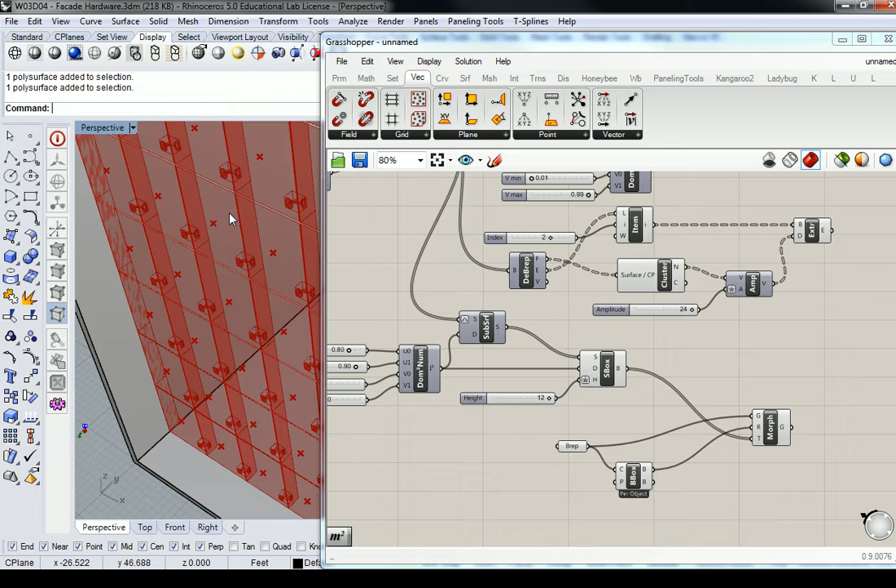All right, moving on then. So we're going to start doing the other hardware pieces, but again, I want to just stop for a moment and make it abundantly clear to you all what the limitations are of doing it with this method. So it works really fast. That's the very first awesome thing about it, because it just automatically populates all of the hardware on these particular planes in all cases.

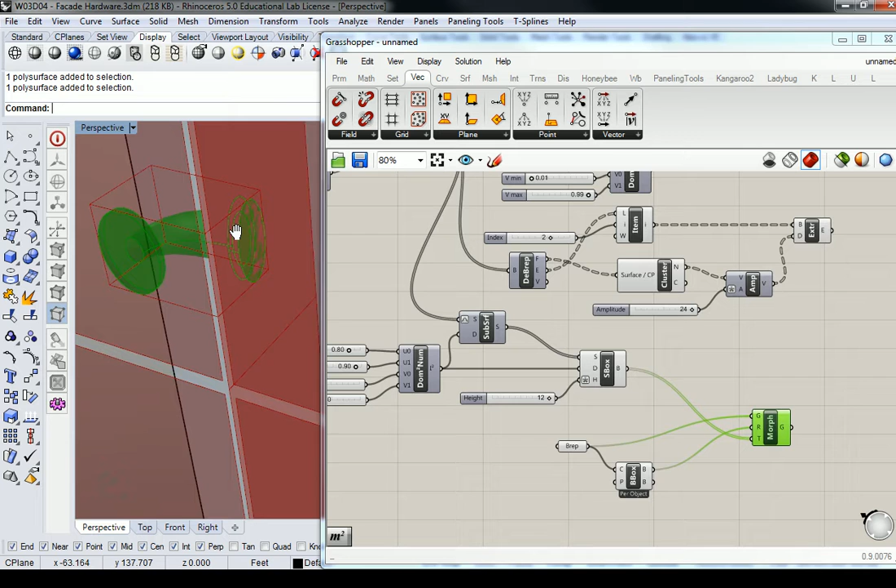However, if you look at it closely, you'll see that the geometry gets skewed. Basically as I modify this, the geometry itself will change. So if it gets kind of squished, then whatever used to be a circular element is now an elliptical element. So that's just something to be aware of. Point 2, I think, is what I had this at. Yeah, so that's just something to be aware of.

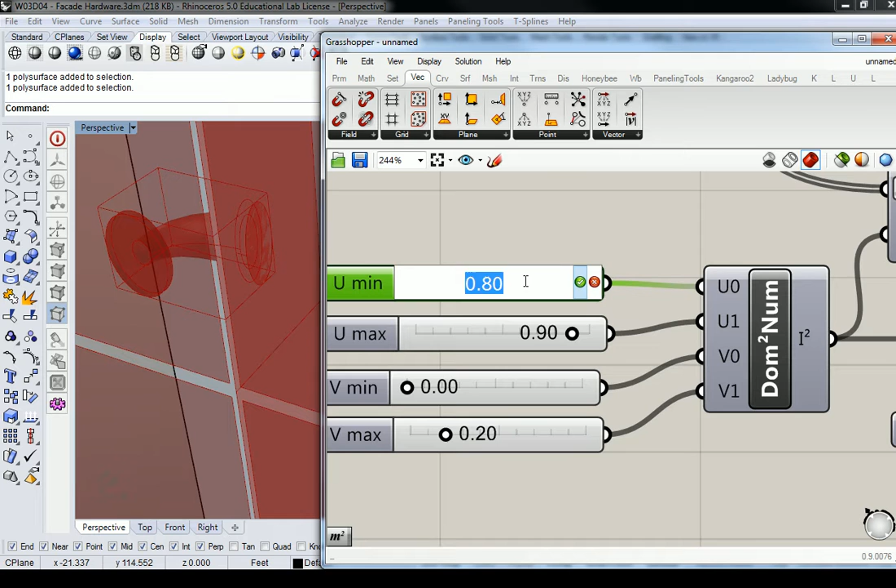If it's important that everything be properly sized and scaled, then you need to find a way to put it in that particular location in that size, and that's what we're going to look at next. But if I'm going to try and get this to be a little bit more actually circular, I'm probably going to reduce the U minimum here to like 0.85. Oh no, that's actually not good. I'll just leave it at 0.8. It's probably good that way. It's good enough for my purposes anyway.

So basically, when you're doing this, you have to do it a few times in order for it to work properly. And the challenge really is whether or not you can run things through the same process, or if you have to duplicate the entire thing. So the simple way that I'm going to do this is to create a surface output with a wireless connection here, and then it's going to be just a lot cleaner.

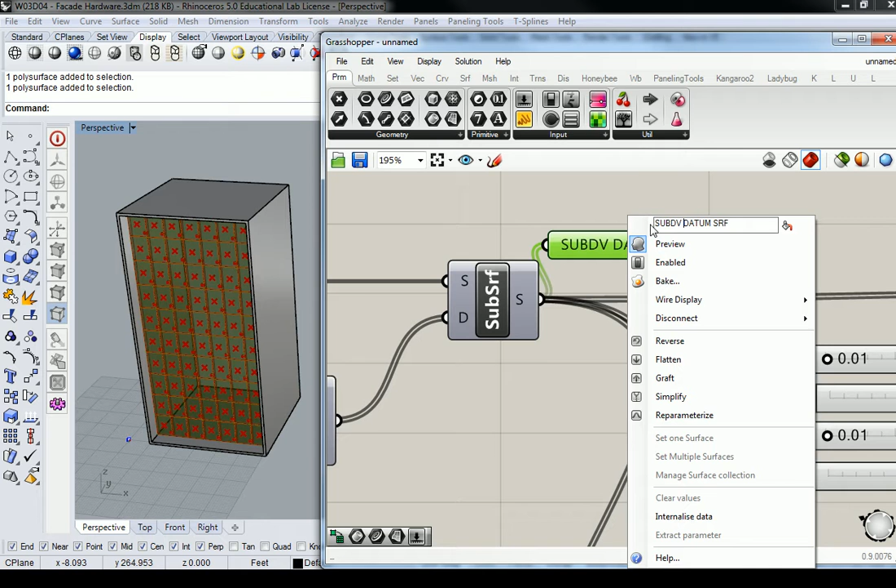So I'm going to do it with the surface param, and I'll name it datum surface. Actually, I'll call it sub dv datum surface. Plug that in. You can call it whatever you want. That's just what I'm calling it. Is it going to do the first subsurface? Yes, first one.

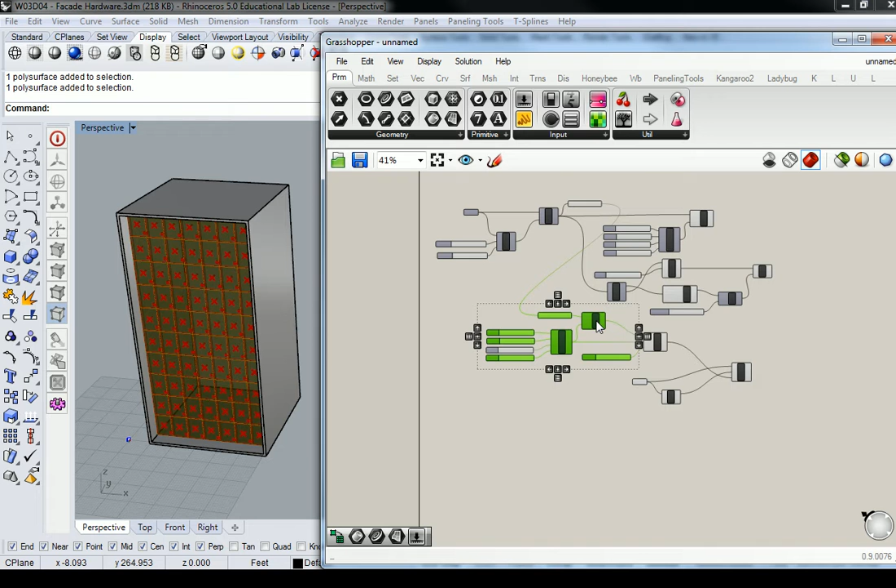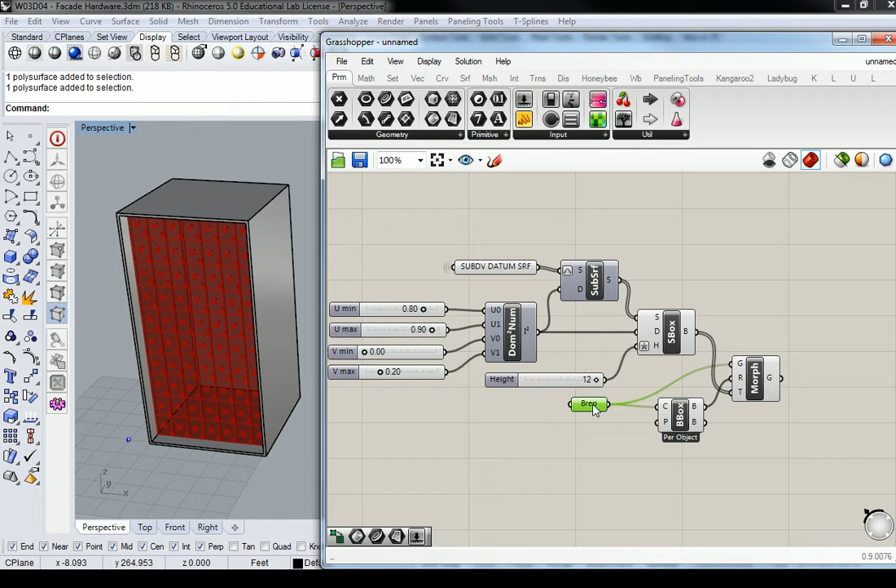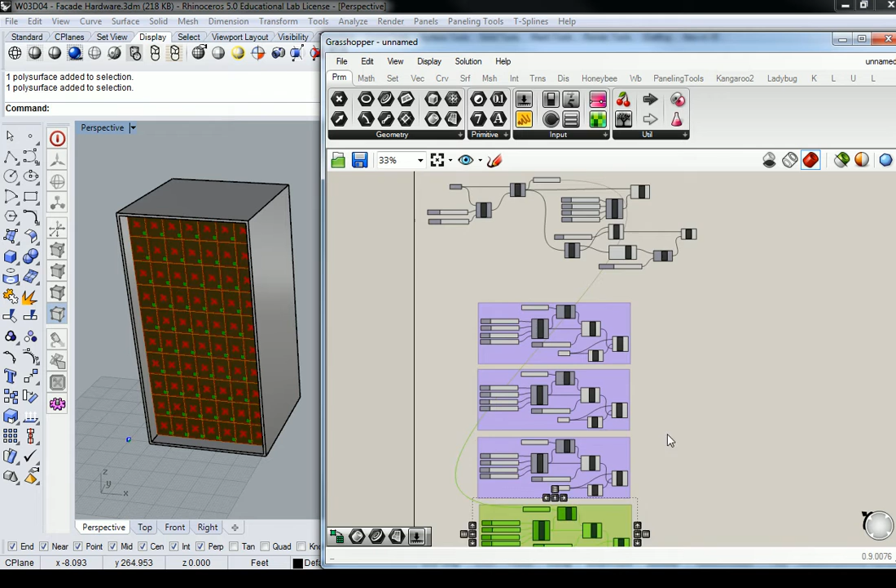All right, so I made that a wireless, and then I'm going to plug this in here. So that way this whole thing just becomes fully autonomous. So now I can select this stuff and move it away. I'll clean it up so that it becomes much, much smaller. There we go. And then simply put, I'm going to group that, and then just make a copy of that whole group 4 times. Looks pretty clean, right, guys?

Okay. Well, the other part that you will have to do here is to modify the actual numbers. The numbers can be modified a few different ways, and one of the ways that I encourage you to think about doing it is through mathematical principles, basically your simple arithmetic that helps you limit the number of changes you have to make if you ever have to make a change. It also helps to keep alignments done properly.

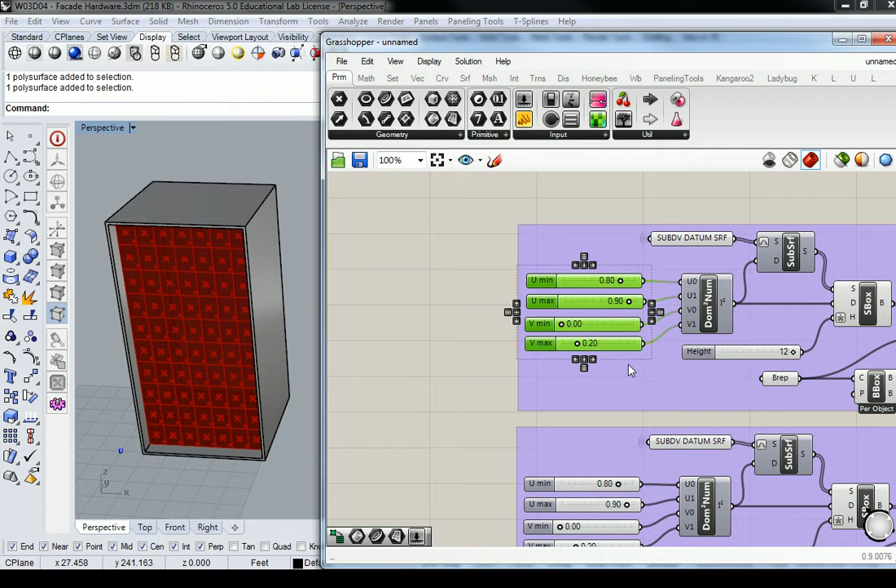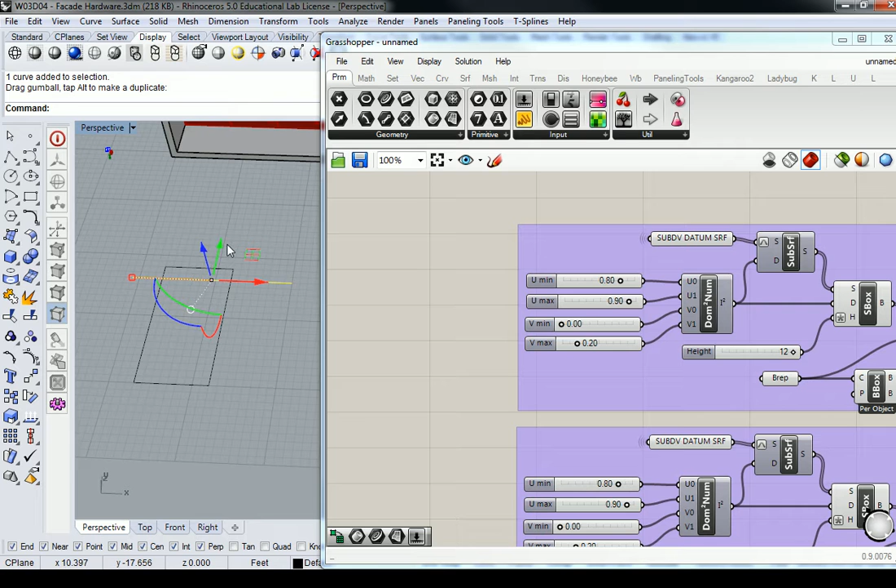So the way I'm going to do this, starting off here, well, let me kind of draw it. I'll draw it out this way, right here. You guys don't have to do this, but I want you to just understand what I'm doing. So I have a panel that looks like this. I also have a line, right? So basically, when these things are moving proportionally, I'm moving a certain percentage down this way, and then I'm moving an additional percentage down to the other side.

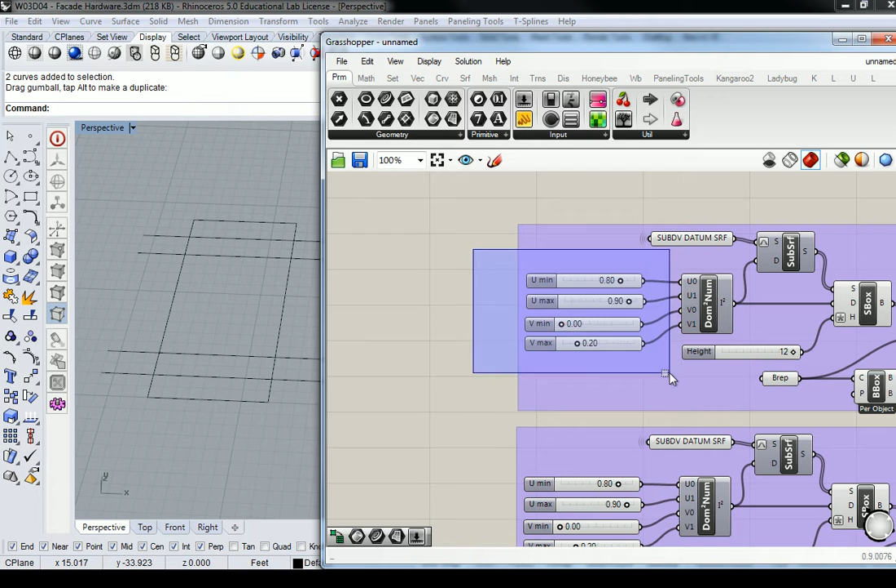So if I want everything to be symmetrical on each of these panels, then I want it to move the same amount from here to here that I want it to move from here to here. You guys can do that mathematically using the same sliders. You know what? In this case, it's not imperative, and frankly, when you're doing something like a dynamic surface, you're not going to have to be doing these calculations anyway, because every single number is going to be automatically generated. So I'm not going to bother with that. Let's just go with this.

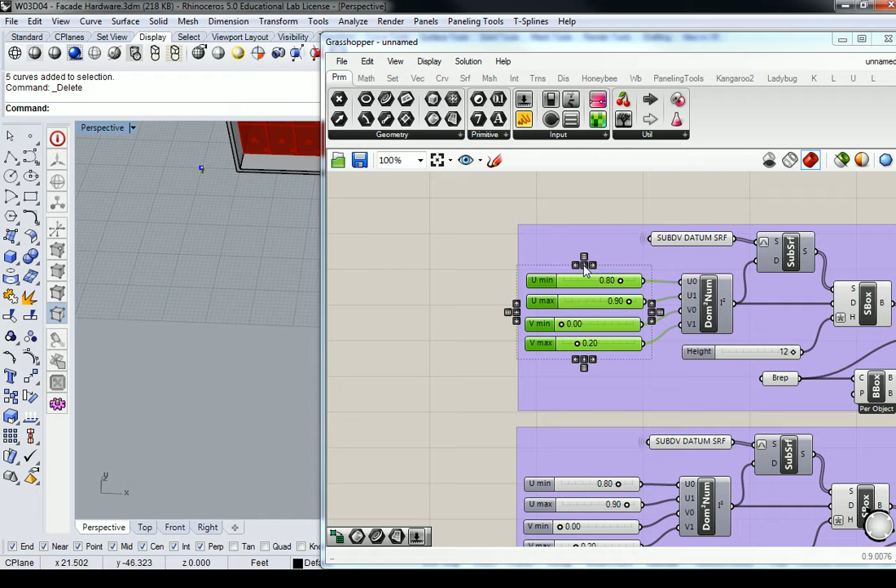I need to turn some of this stuff off. In fact, I'm going to turn it all off except for the last item, the morph. And I'm going to turn all of this stuff off as well.

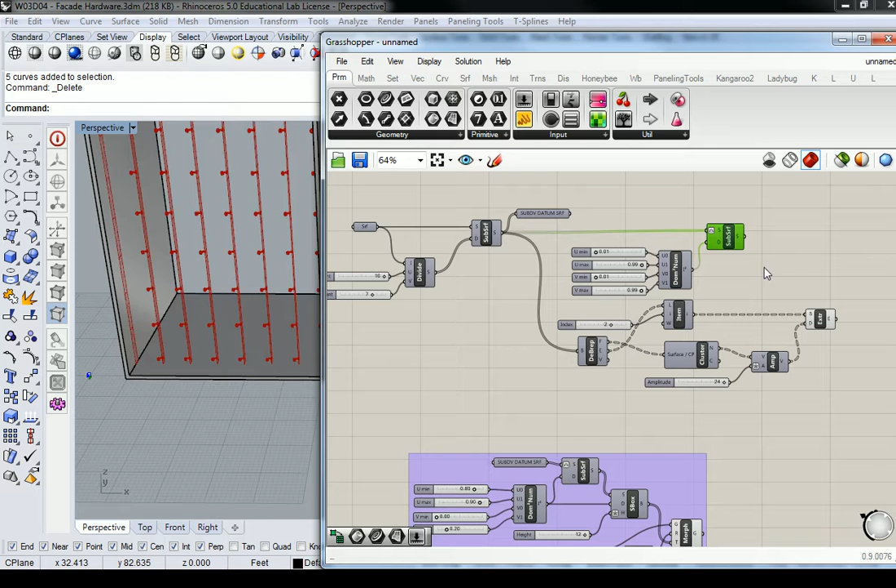There we go. So I left on the fin, I left on the subdivide surface, and the last piece, the morph. So the next one I want to do here is the vertical one, or the one that's relocated on the vertical side of the panel. So notice how this one right here was a value of 10% of the panel in height, and it was located with a spacing of 10% of the panel away.

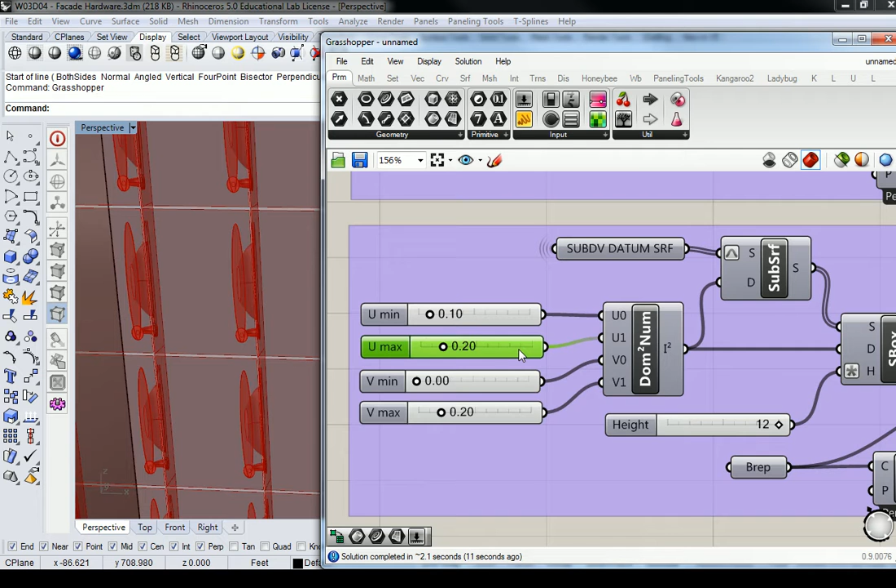So if I have to do that from the other side of the panel, then ultimately I'm going to take these numbers and invert them to be, you know, a 10 and then a 20, because it's 10% away and then it's 10 wide. So I'll start off by jumping this one to 0.1. Oops. You'll notice it's going to look pretty crazy. And then this one is going to go to 0.2. All right, simple enough, right?

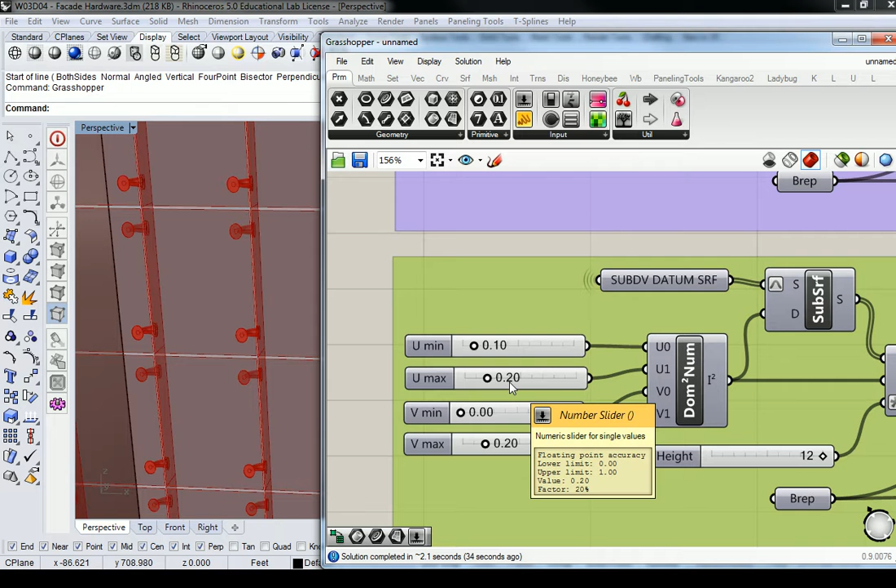I just have a question. Is there a relative place that they have to be placed in? Like a certain distance from the edge? Yep, that's what this determines. No, but I mean like an actual... Is there like a... You mean an actual construction? Yeah. Oh yeah, your engineer will go through and tell you. I mean, basically your facade engineer is going to have all that information. Yeah.

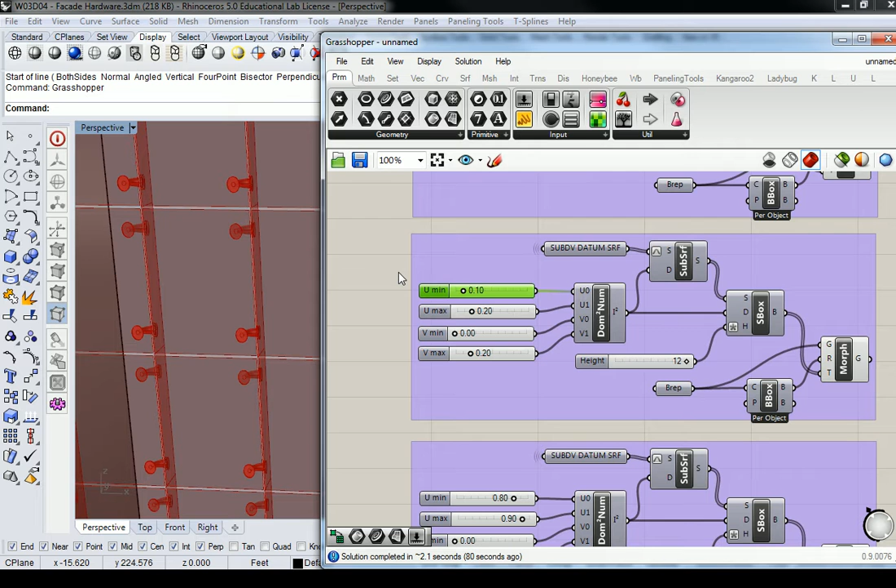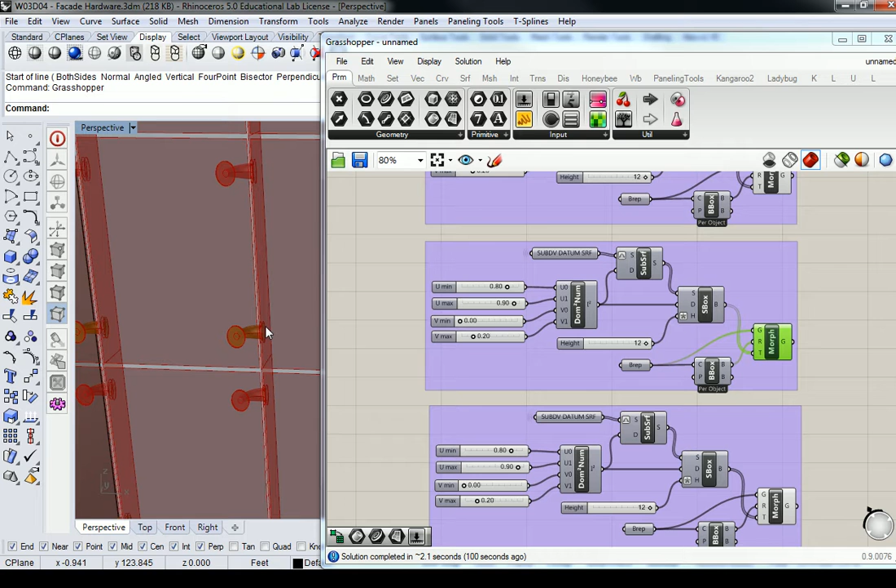So that was number 2, and then let's go through and do the other ones here. So the other one, I'm going to take this one in the bottom right. That's where it exists right now, and I'm going to move it over to the other side. Now, when I move it over to the other side, that particular geometry is no longer going to be facing the proper direction. So I'll show you what I do for that one. But in order to move it to the other side, we have to invert the opposite values that we just inverted in the previous one. We need to invert the values on the V direction instead of the U direction.

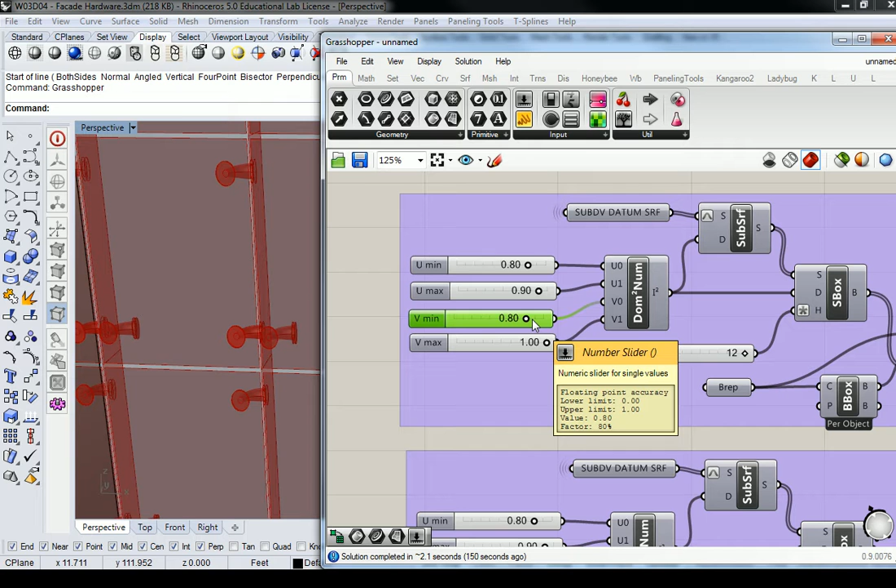So here in the third box, we start at 0 and we end at 0.2. So if the values start at the edge and then end 0.2 away from it, if we're going to invert that to the high end, we have to change this to a 1. And this changes to a 0.8. Still a difference of 0.2, we just slid it up the scale to the other side. So what you need to be aware about this, guys, is that the morph, while it moved it to the other side, it didn't reorient it.

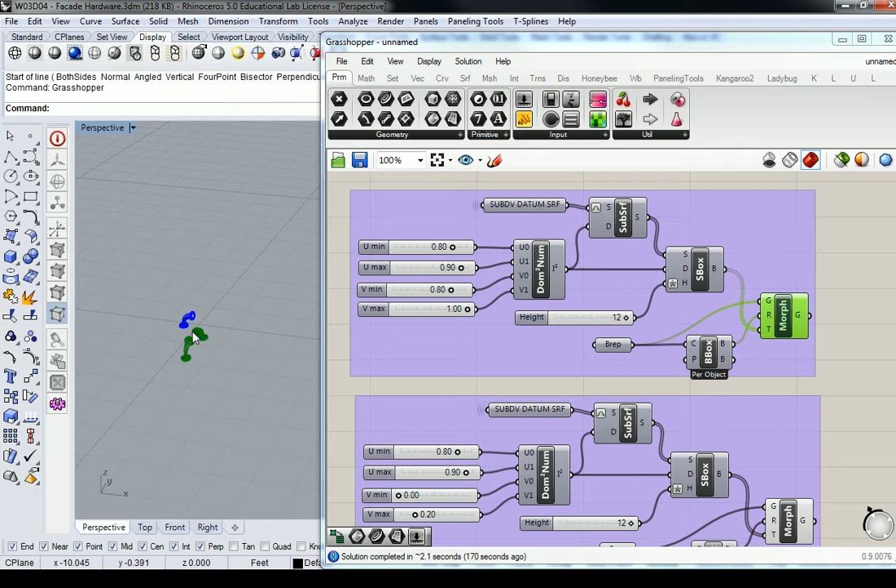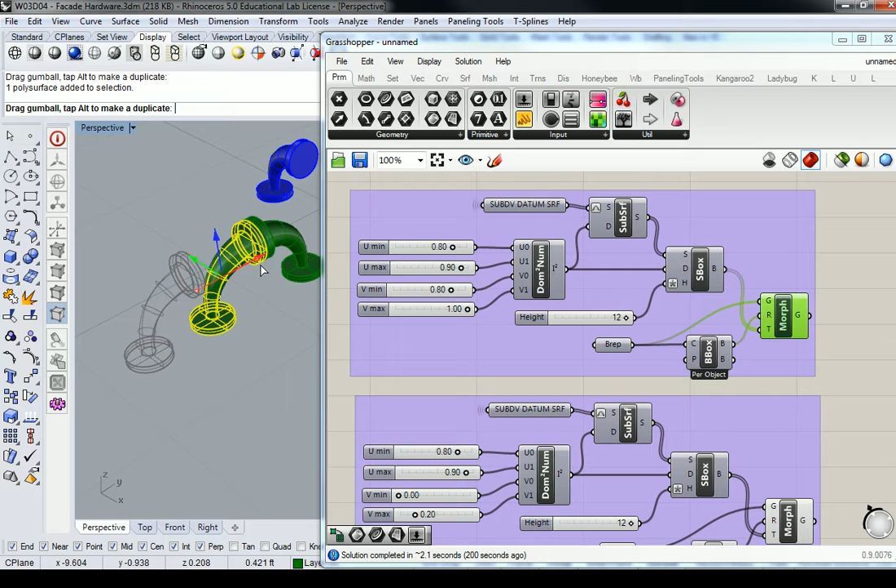So if you're curious about how to do that, that's why I included 2 hardware pieces. I included two because this one is the one I just referenced previously. But I made a competing one here because I knew that I wanted them to face opposite directions and I wanted them to connect roughly in the same spot. So ultimately it's, oh, I have the grid on, hang on. Grid snap, turn that off, there we go. So ultimately these are supposed to connect here on the surface box. So that's why I have them sort of facing opposite directions.

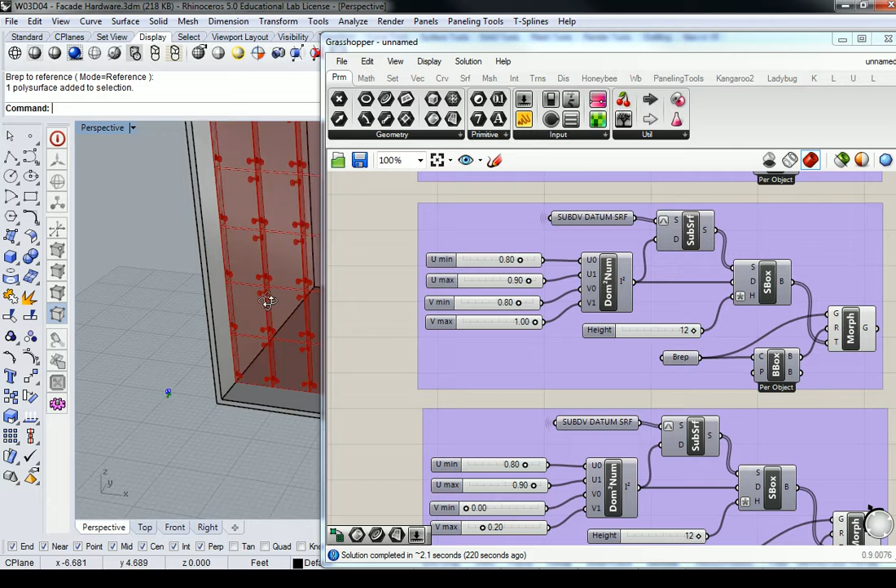So that basically means instead of the previous brep, I need to set it to the opposite one instead. So now I'll zoom out, and you can see that this one now faces the opposite direction. You see that? So then jumping down to the very last one, the last one is still currently in the bottom right corner. So I need to change three things on this. I need to change the U-min and max, the V-min and max, and I have to change the brep. So I'm going to first change the brep. So I'll right click and say set one brep, and I'll select the opposite one down there.

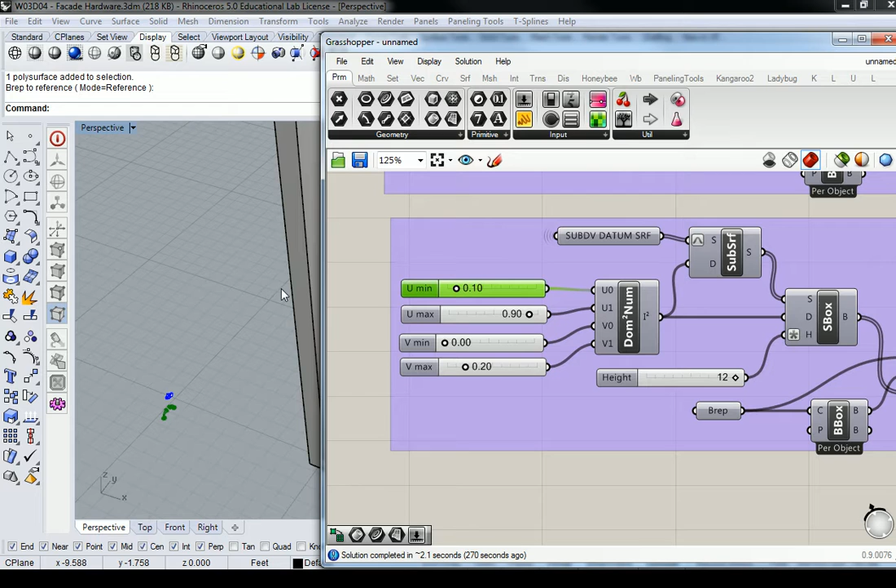And then I'll change these values. So again, this is going to be a 0.1. Oops. And then this will be a 0.2. And then I need to slide everything to the other side of these sliders. So the Vmax is going to be a 1. And Vmin is going to be a 0.8.

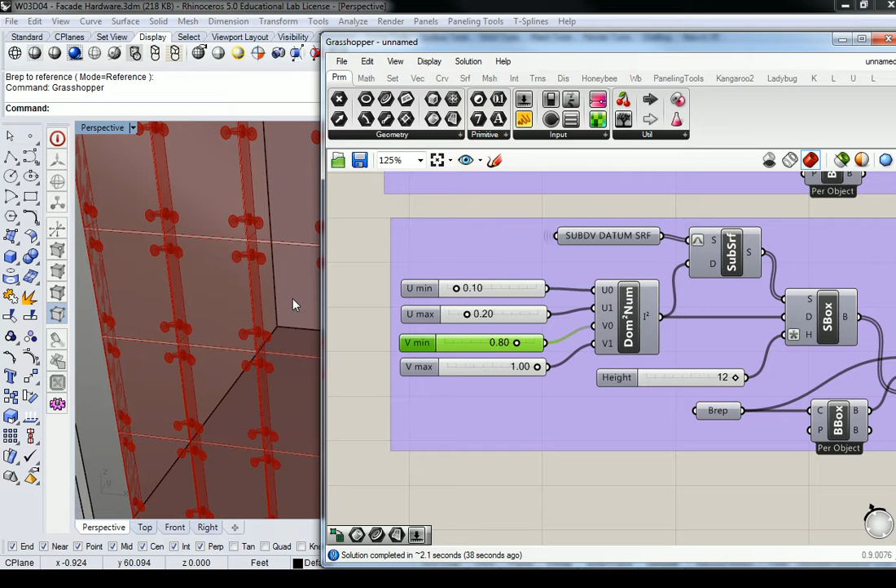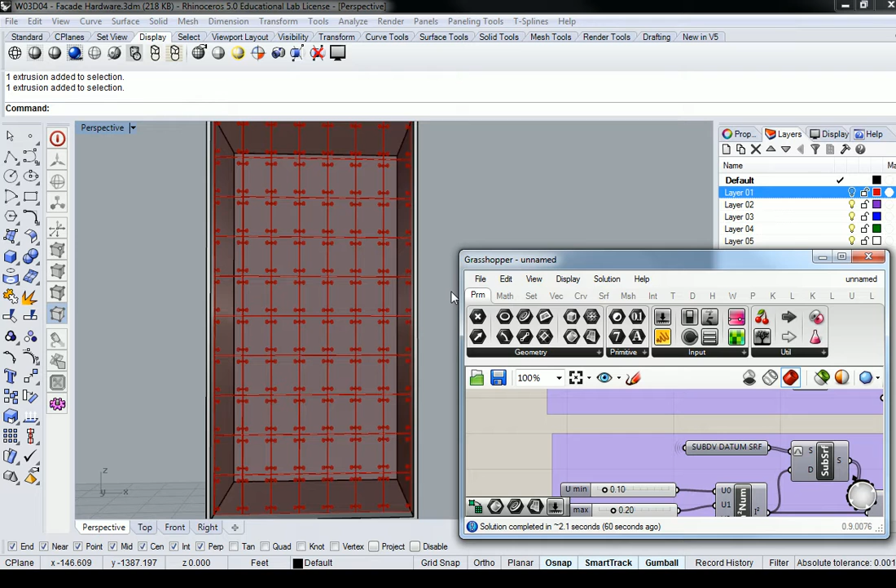And to kind of simplify this here and just look at the whole system that we generated, basically what we did is we created an entire 10-story, so to speak, facade complete with hardware components in very little time. The only problem is on the outside, or on the edges, there's still some facing that way. There shouldn't be. Mine are facing in. Oh, okay. So if yours are facing the opposite way, then you need to revise in order to get it to face the proper way.

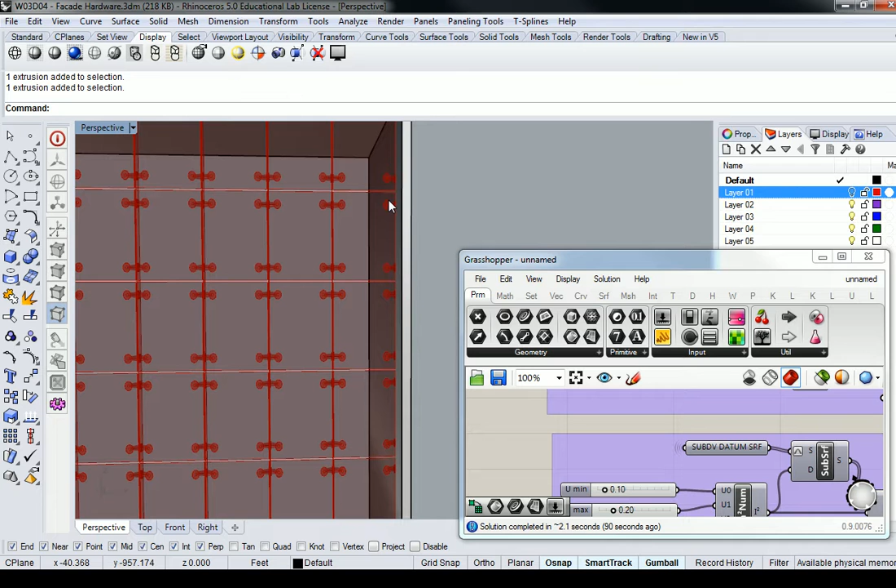Any other questions about this before I make sure you're all caught up and we take a little break and then move on?